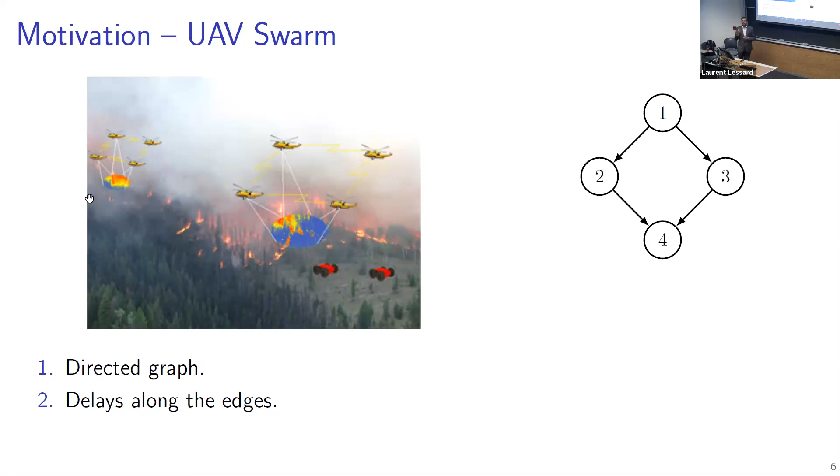Moving forward, the next challenge is the presence of continuous time delays, which actually increase the problem complexity, because continuous time delays have irrational transfer functions, and they cannot be as easily handled as discrete time delays.

The goal of our work is to actually find a globally optimal controller that is subject to these communication and delay constraints that we actually saw earlier in our various motivating examples.

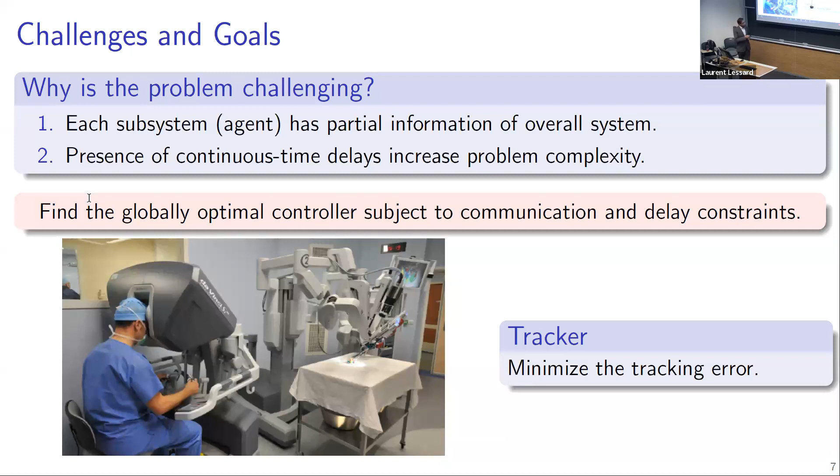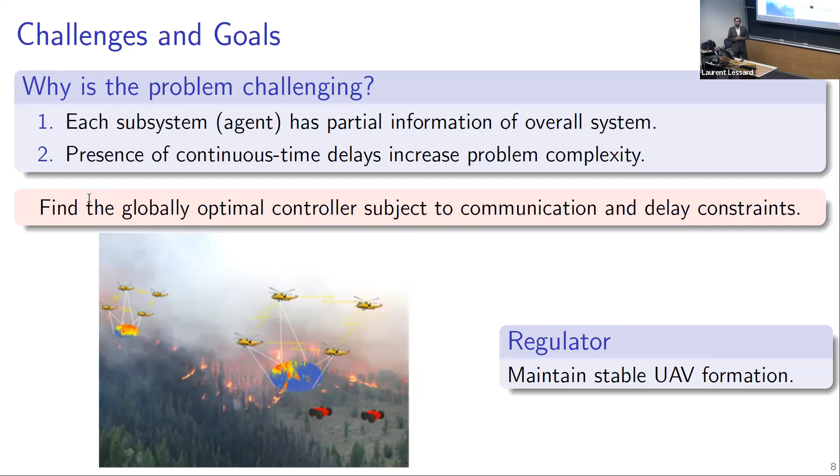So it could mean designing a simple tracker for this robotic surgery problem, where we would like to minimize the tracking error between the prescribed trajectory and the actual trajectory of a surgical instrument for obvious safety reasons. Or it could mean designing a regulator for the swarm of UAVs, where we would like to ensure that the UAVs maintain stable UAV formation in presence of massive wind gusts that could occur during forest fires.

Moving forward, I would like to present a brief outline about the rest of the presentation so that we are clear on what exactly we're going to cover in the rest of the talk. So I will start with a brief description of the problem setup on decentralized systems with delays. And then I'll move forward to our first project where we derive the optimal decentralized controller with delays.

And before that, we will actually do a simple literature review of previous works done in that field and any adjacent fields. And then we will investigate whether the elegant structural properties that we often associate with the centralized system problem actually get preserved in the decentralized case or not. And then we will see through a simple numerical example our optimal decentralized controller in action.

And then we will move on to the second project where we establish robustness guarantees for optimal decentralized controllers. So robustness is a key aspect of controller design because we would like to design controllers that could tolerate and compensate for external disturbances, any plant uncertainties, or modeling deficiencies that could affect the overall system.

And more specifically, we'll be studying the stability margins for these kinds of controllers. Here, we do not have any delays present in the problem setup. And through a numerical example, we'll see under what conditions exactly these stability margins actually exist. So without further ado, let's start with the problem setup.

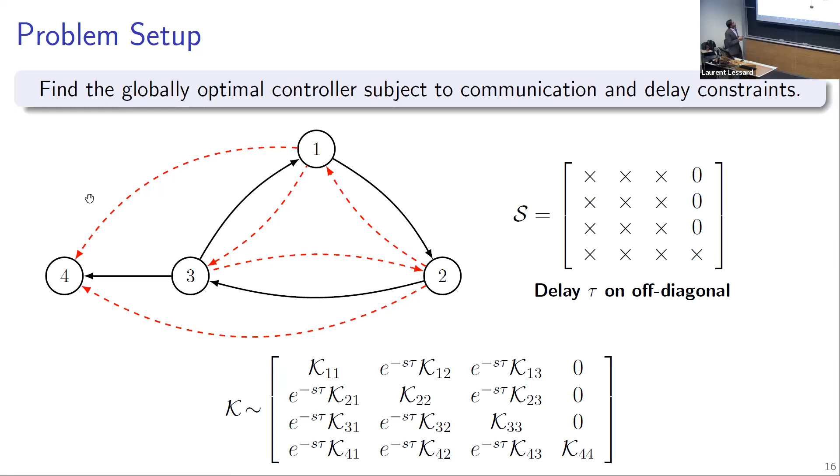Now let's move on and understand the local dynamics involved at each of the agents. Let's take the simple example that we considered earlier, the swarm of UAVs, and look specifically at UAV3. So UAV3 is represented by the plant G3, and this G3 will have linear dynamics captured by these two equations. Here X represents the state of a UAV, for example, the position and velocity of the UAV. And this differential equation shows the evolution of that state. Similarly, this equation is known as the measurement equation, where yi represents the measurement of a UAV. So some measurements done by sensors, for example, we measure the height using an altimeter present on a UAV.

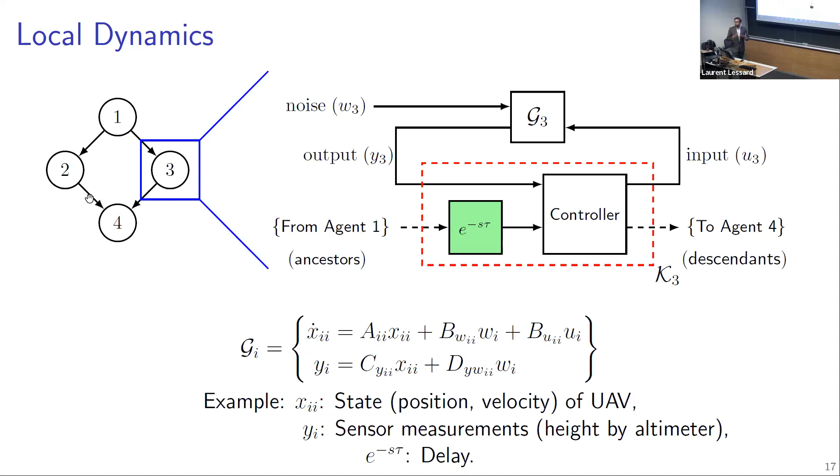So this plant G3 is affected by a Gaussian disturbance W3. It has a measurement or output Y3, and it has a control signal or input going into it known as U3. And it receives some information from agent 1, which is its ancestor, and that is delayed by the processing delay of tau. And once it utilizes these two sets of information together, the controller of UAV3 generates the control signal U3 and transmits some information to agent 4, which is its descendant. So this is what the local dynamics at each agent actually looks like. And once we obtain these local dynamics, we aggregate them all together to obtain the global dynamics of the overall system that we're considering.

So we aggregate the dynamics together to obtain the global dynamics presented here in this figure, where x dot equals Ax plus some other terms represents the evolution of the global state of this overall system. So x is the global state, which is simply a stacking of x1, x2, x3, and x4, all the 4 vectors of the 4 UAVs together. A similar notion exists for the noise vector W, the input vector U and the output vector Y, which are just the aggregation of the 4 vectors together. So we have the global state evolution differential equation, and then we have the global measurement equation. And this is in feedback with a global controller K, which has the structure of the adjacency matrix S.

And to reiterate, since we made a simple dynamically decoupled assumption for all the agents, and we are aggregating the local dynamics together, in that case the state transition matrix A, the input matrices BW, BU, and the output matrices CY and DYW are actually block diagonal in nature.

And finally, Z represents the regulated output of the system. It's a performance measure that we are optimizing for. And we do not make any assumption on the matrices CZ and DZU, so they do not have any special structure and they can be full. So in this case, the states of each of the agents and the inputs of each of the agents are coupled together. And this is actually reflected in the cost function that we'll be optimizing for.

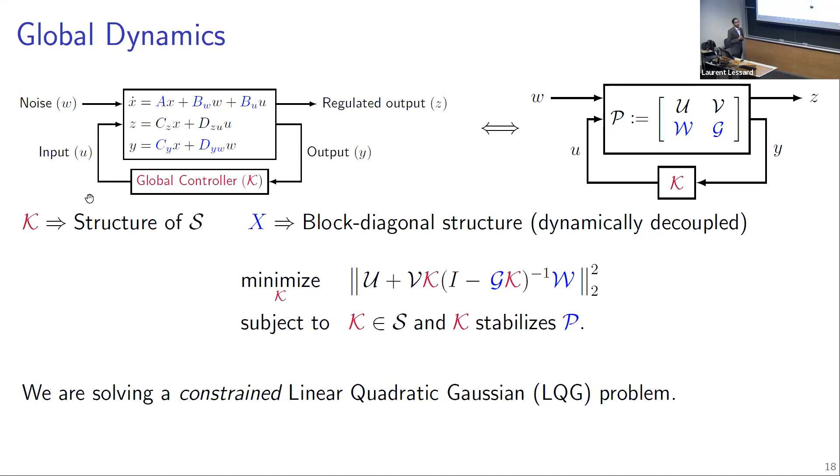Moving forward, let's jump to the results of our first project. We will start with a brief literature overview of centralized systems and adjacent works and delays before we proceed to our results. Let's begin with the well-known centralized linear quadratic Gaussian case. So here we are considering a single agent G, which is in feedback with a controller K. It has a measurement Y and a control input U.

So in this case, the optimal control policy is linear, and we have a closed form solution for the global optimal controller. And this controller K has an elegant observer-regulator separation structure shown on the right over here. The observer is a Kalman filter, where L represents the Kalman gain, T represents the observer dynamics, BU is the input matrix, and F represents the LQR gain. So our observer is making a prediction of the state of the plant G.

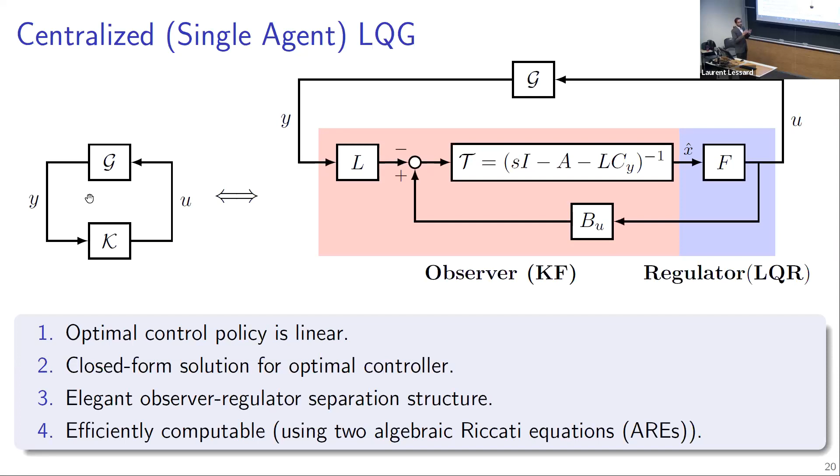So this is a very well-studied problem, and this work has existed since the 1960s. And the solution for this controller is extremely efficiently computable, because we do not have to resort to any numerical techniques; we have to solve 2 algebraic Riccati equations. So these are all the elegant properties of the centralized LQG system.

So now that we know the elegant properties of the centralized LQG system, which is presented here on the left, the big question is, for a general decentralized LQG system, do we have all these elegant properties? Or does something else happen over here? The fact is, if we are studying a completely general decentralized LQG system, for example, if we impose a structural constraint on the controller K, then there need not be any linear optimal control policy.

And in fact, Witsenhausen in 1968 showed that for a simple two-agent system. And these kinds of problems are extremely hard to solve. There is a plethora of literature on trying to solve general decentralized LQG problems using various numerical techniques. And the other aspect to remember in a general decentralized LQG case is that none of the elegant properties we saw in the centralized LQG case are transferable to the decentralized LQG case. So there has been study of several special cases of decentralized LQG systems by making assumptions on the plant structures and on the information sharing pattern.

For example, Ho and Chu in 1972 showed that an optimal controller is linear if we have a partially nested information sharing pattern. And Rotkowitz and Lall in 2002 established the notion of quadratic invariance, which is used for solving for this linear optimal controller by casting it as a simple convex optimization problem. And note that this convex optimization problem is still infinite dimensional, and we can actually use numerical techniques like vectorization to solve for the controller to arbitrary accuracy. And there has been a lot of literature in that area as well.

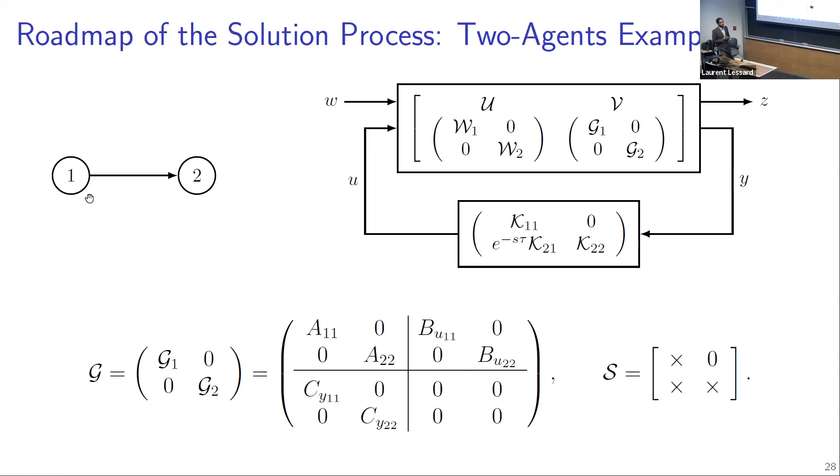So following this, let's look at the roadmap of the solution process for a decentralized LQG problem. So we started with the constrained LQG problem that we saw earlier. We have the structural constraint on the global controller K. Now, once we have that, we utilize the notion of transitive closure to prove quadratic invariance established by Rotkowitz and Lall in 2002. And once we have proved that, we can leverage the Youla parameterization again to cast this non-convex optimization problem as a convex optimization problem in terms of the parameter Q.

And next, we use the dynamically decoupled nature of our systems to separate out this global convex optimization problem into n separate optimization problems. In fact, the separation occurs along the columns of the parameter Q. So one of the optimization problems here would be solving for one of the columns of Q.

Now, once we have this kind of setup, as you can see, we still have continuous time delays in the Q parameter. So we can leverage Mirkin's result in the third step to cast these n centralized delayed LQG problems into n non-delayed centralized LQG problems. And this is how we do it.

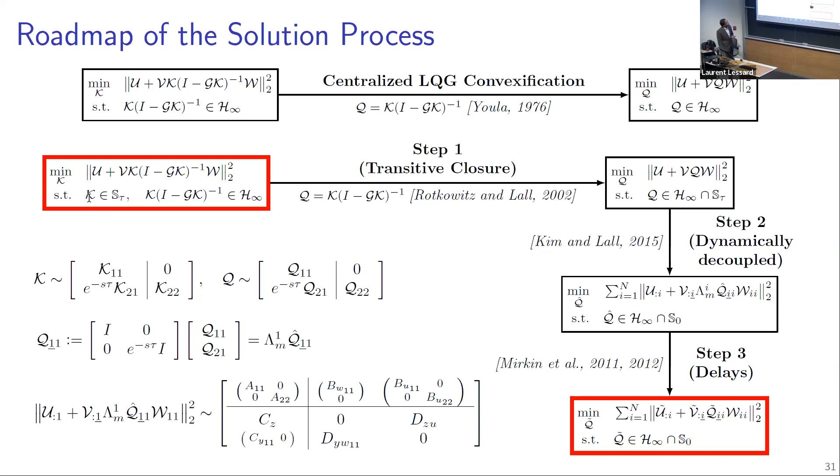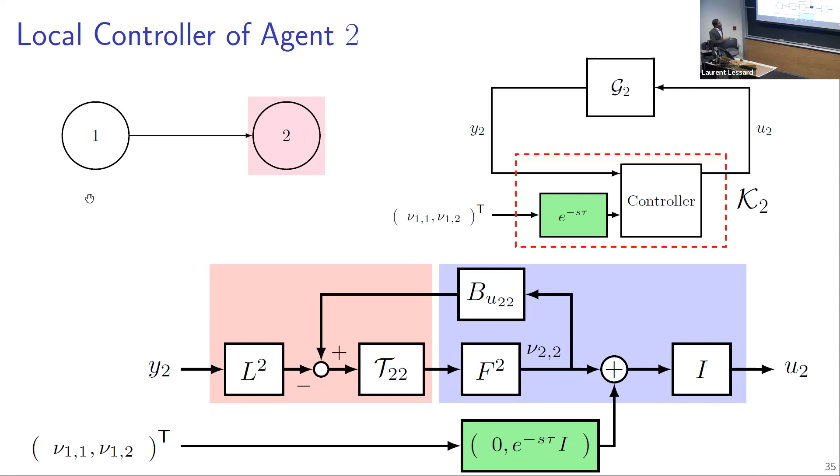So what does the second agent do when it receives this information? It receives this full information, but utilizes only the second set of information, which it delays by a processing delay of tau. And as before, it has its own measurement Y2 and a control signal U2. So it processes its own measurement Y2, multiplying it with a Kalman gain, an observer dynamic, an LQR gain F2, and then it sums the information that is received from agent 1 with its own predictions and generates the control signal U2. This is what the local controller at both agents looks like. And as stated, we still have the observer-regulator separation structure as mentioned earlier.

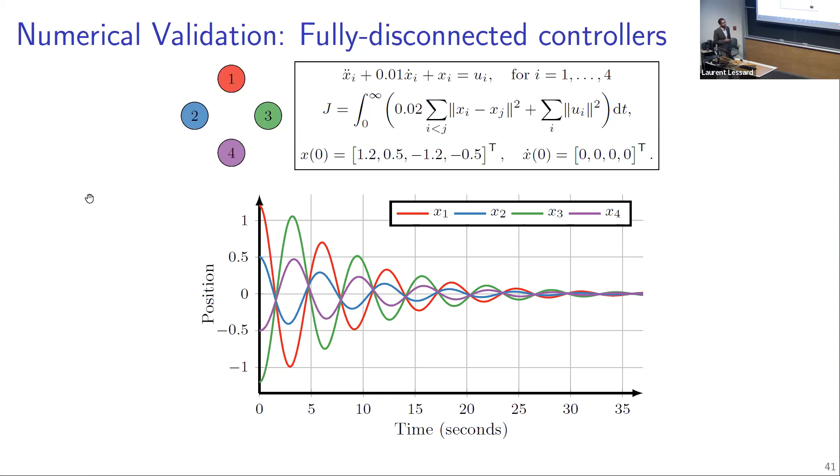And once we implemented our decentralized controller, as you can see in the position versus time plot, all the positions start from different initial values, but they start synchronizing at around 25 seconds. And further on, they remain synchronized. So this is our optimal decentralized controller in action.

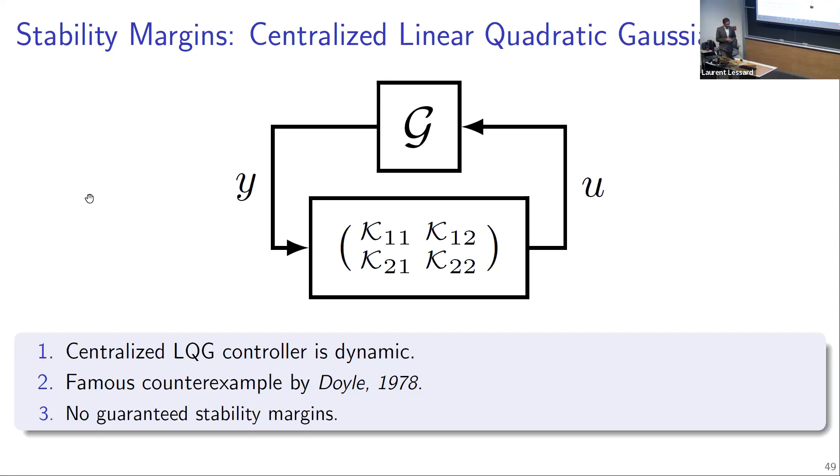So with this observer, you have observer dynamics where it predicts an estimate of the plant state X. So this is what makes a controller dynamic. And our centralized LQG is obviously dynamic. And there is a famous counterexample by Doyle in 1978, where he showed that there are no guaranteed stability margins for this case. Now let's recap the work on decentralized LQR by Shah and Parrilo and Swigart and Lall.

So I would like to stress over here that our problem setting has changed substantially from our previous project that we presented earlier, and I will stress where the problem setting has changed in my brief description now. So we have plant G here, and we are directly observing the plant state X. For example, in the two-agent case, we are observing X1 and X2, the states of agent 1 and agent 2. In comparison, in project 1 we were dealing with a linear quadratic Gaussian or output feedback case. So now we are directly observing the plant state X. That is one key difference from the previous setup.

And the fact is, based on the transitive closure graph of this kind of system, our controller K has the structure of the adjacency matrix S, and it follows the information sharing pattern of this two-agent system. And to reiterate, our plant G also has the structure of the adjacency matrix S.

So because our plant G has the structure of the adjacency matrix S, we can actually consider our state transition matrix also having the structure of S, and similarly the input matrices also having the structure S. And this is a critical difference from our previous project setup that we considered. We are no longer considering dynamically decoupled systems. So we do have some form of dynamic coupling, provided the structure of the plant also satisfies the structure of the adjacency matrices.

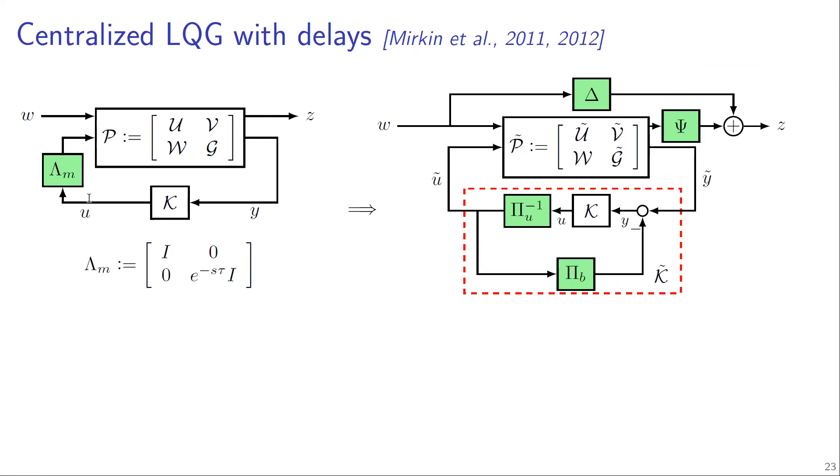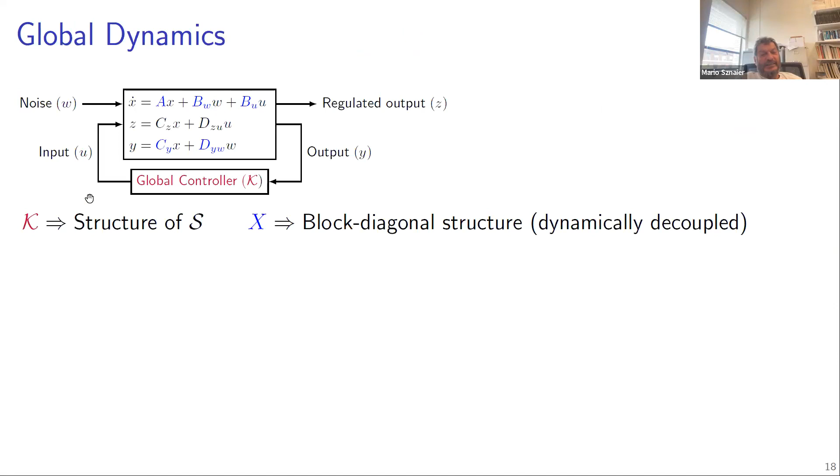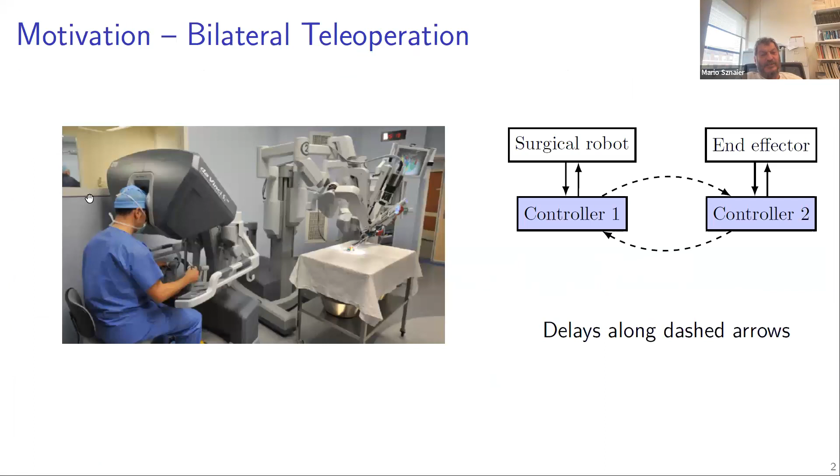I have a question regarding the second portion of your thesis. When you're talking about gain and phase margins, that's what we teach our undergrad students, but they are not really something we should rely on, right? Because the gain margin assumes the phase doesn't change at all and you're changing a single gain in your system. And phase margin, you keep your gains and change your phase.

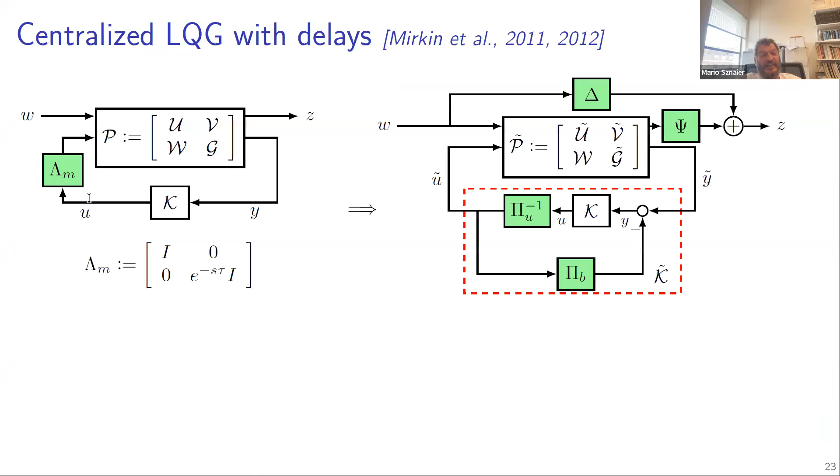But sometimes you have perturbation both in gain and phase, right? Your results are very interesting. I was wondering what happens if you consider perturbation in both. In other words, if you look at the H infinity norm of the points where the perturbation enters, or if you do a mu analysis type, do you still recover the same margins that you had for the LQR?

Yeah, that is a good question. To answer in a short way, that brings up the concept of disk margins that has been recently studied, where you can have variations in gain and phase, and then the concept of using H infinity control. But that is future work that can be considered to take this work forward.

To answer frankly, we did not study the case when we have a change in both the gain and the phase simultaneously, because we did not have much time. Even when we independently perturbed just the gain and just the phase, during the solution process we thought we did not have any guaranteed stability margins because it's a dynamic controller. And we never got to study when both are simultaneously changing.